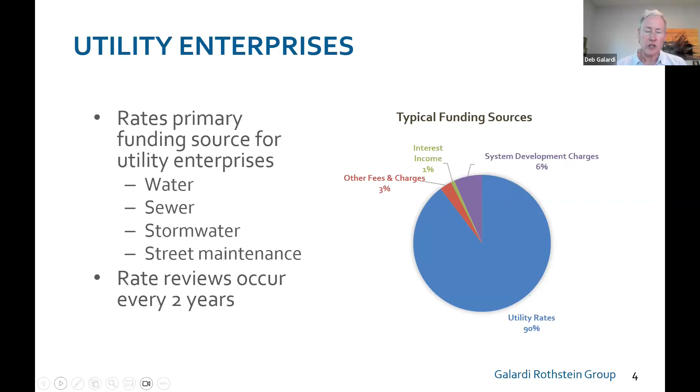So these systems we review. I say we because I worked with the city on the last couple of rate reviews. Every 2 years, the financial plans are updated and rates are adjusted accordingly. Next slide, please.

So just to point out that on your municipal service statement, there are a couple other fees that you receive that are outside of the rate review process. That's the public safety fee and the communication officer fee. Those are established by a separate ordinance, and council makes the decisions in terms of those rate adjustments. But the water, sewer, stormwater, and transportation utility fee, you can see on this example bill, just to orient you as to which systems we're talking about. Next slide.

So the rate review process includes 3 main components. The first is to identify the financial needs of the systems. So this includes the capital improvements. Those are the improvements to the physical infrastructure of the system. There's debt service, which is paying back borrowing associated with previous improvements for the systems, or in some cases, as in the case of the water treatment plant, most likely will be future debt service.

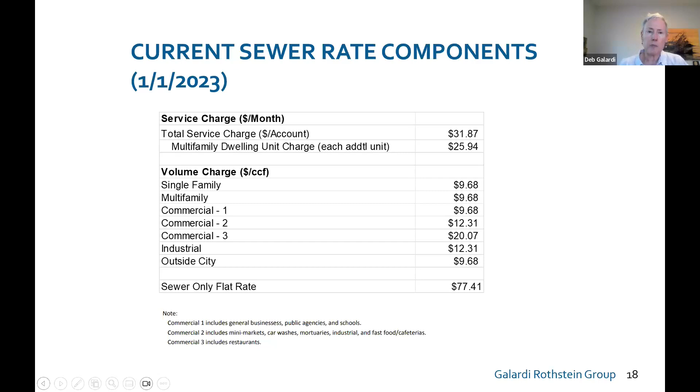So if I'm in an apartment and I'm using 4 units, I'm going to pay less than somebody in a single family home that's using 8 units. But the price per unit is the same because the wastewater concentration is generally the same. Okay, got it. Thank you. Yep.

Transportation utility fees are scaled based on the trips generated per 1,000 square feet based on national data that relates to the different types of land uses. So industrial and warehouse have a lot of area, but fewer employees and things to generate the trips. So they pay a smaller fee per unit. Office also has quite a lot of square footage perhaps, but not as many employees.

And then the rate goes up per 1,000 square feet when you get to more intense trip generating uses like retail, supermarkets, fast food kinds of things, which generate lots of trips. So this is the standard rate structure that's used in the state. There's at least 24 other cities and more that are in process of developing these fees for the reasons that Lance articulated.

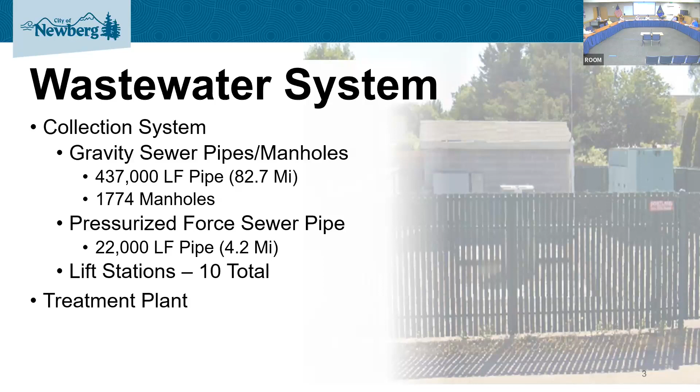So that is in effect extra maintenance and extra expense that the public system is absorbing versus a private individual property owner. Again, the decision was made long ago. Next slide.

The wastewater treatment plant is the really intense capital part of the wastewater system. It's located at the south end of town, close to the Willamette River, right off of Wynooski, I believe is the right street. Built in 1987, it uses a very traditional treatment system and has a capacity of about 4 million gallons a day. In the summer, that runs at about 2 million gallons a day. In the winter, we usually are around 3.5 million.

And you can see part of the issue with gravity pipes and lines and anything in the ground is that in the winter in Oregon, it rains. And so you get a lot of groundwater inflow into the system for a variety of reasons. So that's why you see that flow rate go up in the winter. And it's a little bit of a diluted flow, where you get more of a stronger, I would say, flow where you have less rainwater entering the system in the summertime.

So part of the wastewater treatment plant also includes a very unique solids handling component. The city did get a grant, I think several years ago, to do a solids composting program. So you can actually buy Class A compost, basically almost like topsoil, from the wastewater treatment plant. And that's solids that is processed off the treatment plant and treated to be acceptable for any use, and that includes in your household garden. Total volume there is typically around 2,700 cubic yards of composted solids. It also processes sawdust from local mills to get to that.

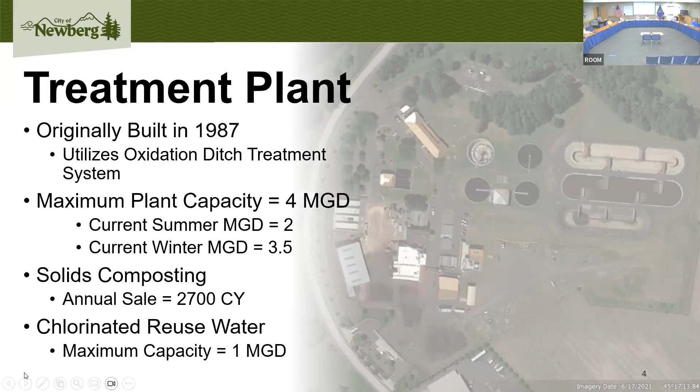So in the sanitary sewer system, the big ones are base system operation and maintenance. The plant processing uses a lot of material, chemicals, electricity, and anything that's moving, pump, motor, eventually it breaks, has to be replaced, has to be fixed, has to be maintained, has to be serviced. All of those things are part of the plant process.

Lift stations are very much the same way. These are pumps, these are electric-based systems that have moving parts and all need to be maintained. Pipes and pipe maintenance, pipe blockages are another big one. Tree roots love gravity sewer lines. They seek them out quite miraculously and are able to work basically through the cracks and joints.

Pipe joints vary based on what pipe you're using. And so typically older pipes are more prone to what we call infrastructure aging, I&I, inflow and infiltration, where as pipes age, the ground will move a little bit and those pipes will tend to separate or fail or thin or crack. And so there's more maintenance that goes with those.

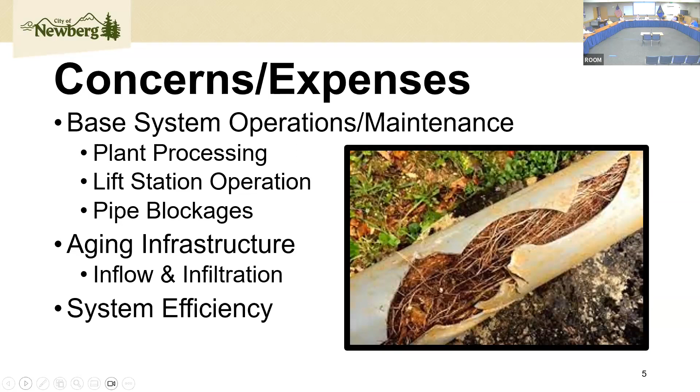The more efficient we can get, if we can do a system improvement where we can do a gravity pipe to replace a pump station or lift station, then that's a good thing, because even though we're making that initial capital investment, we're also reducing our ongoing O&M costs. So sometimes some of those big capital expenses can help offset and reduce ongoing operation and maintenance costs.

Next slide. Here's another example of pipes and pipe systems in the gravity sewer system. An example of I&I where pipe joints have slowly separated over time with ground movement. And then you can see in this picture an example of a video that was taken of a line that separated, and this is actually just groundwater seeping into the pipe through the joints. No root problems here yet, but certainly a problem with groundwater infiltration.

That infiltrated water makes its way to the wastewater treatment plant, also has to be treated just like any other water that enters the sanitary sewer system, and is an additional expense. So one of the things that we also do typically in our capital improvement program for wastewater is pipe repair, pipe maintenance. Pipe lining is a very effective, cost-effective way of dealing with this kind of concern, where we can slip a liner into this pipe, seal it up, and mitigate a lot of that I&I.

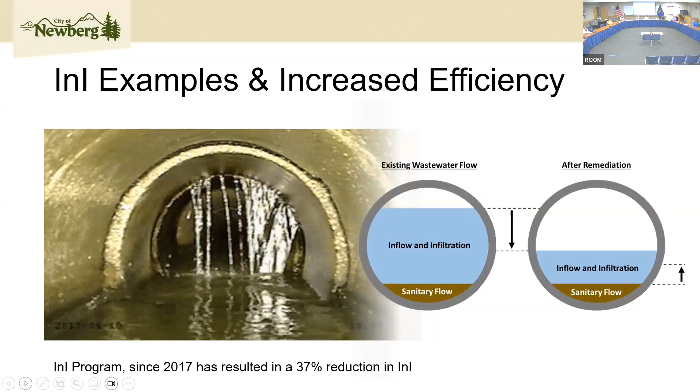Manholes are another source of infiltration where water flows in through joints, cracks, pick holes, you name it, on manholes, particularly in the wintertime. Next slide.

Drinking water system is our other big utility. We'll have additional time to talk about it, but it's really broken down. The way I look at it is source water. Where are we getting our drinking water from? Water treatment, how are we processing that source water so that it's good for us to consume? And storage. How do we store water, particularly as it relates to maintaining reliable flow and supply, particularly for firefighting needs or for peak use.

Storage helps basically moderate how we produce and use water, because typically people will use water at certain key points of the day, when they get up, when they come home, when they go to bed. And then of course industry is using their different times and peaks as well. And so storage helps us moderate those different highs and lows, as well as provide for fire flow where we may need a whole bunch of water in a very short period of time.

And then our water distribution system takes it from where the treatment plant is and from the storage facilities to everybody's individual home and or business.

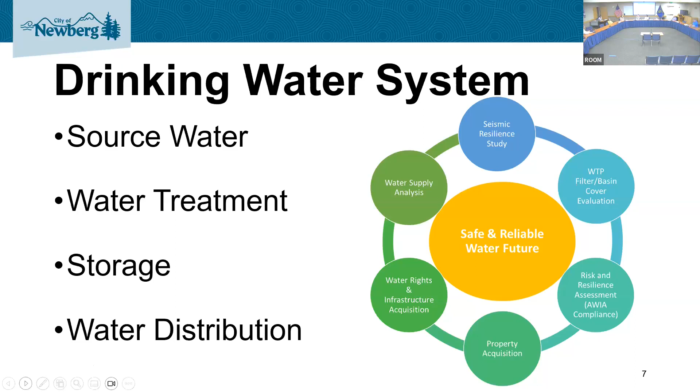Our groundwater system wells are close to the Willamette River, but they are isolated from the Willamette River based on the geological structure of the soil in that area. So we're not actually really taking Willamette River water. We're taking groundwater that's located in a separate layer of rock and soil that's separated from the Willamette River.

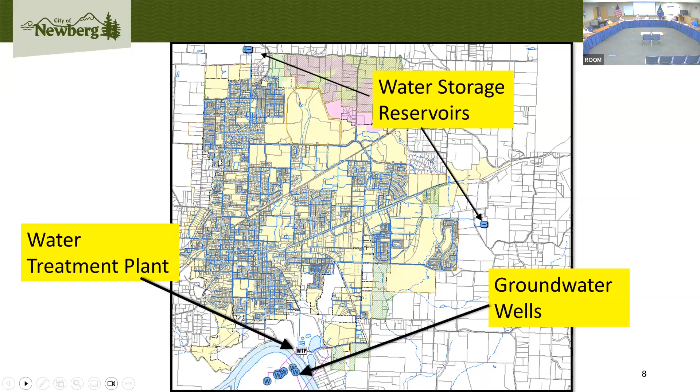Has the water in Newberg always been chlorinated? Yes, and well, let me check that. In the modern era, the water is always chlorinated. My guess is, and I don't know the history of Newberg, but most places when they first started pulling drinking water, they didn't chlorinate. This led to waterborne illness and disease, cholera, those kinds of issues, very common in the 1920s and 30s.

Then we discovered how the world works and that there are microorganisms and all of that. And we now use chlorine. I'm guessing those regulations went into effect in the 50s and 60s, so somewhere in that time frame, you started using chlorination on all your drinking water. And of course, we refine and improve that process over time to have the correct amount of chlorination to have safe drinking water, but not to over chlorinate the water so you don't have other problems as well. So it's a complex system that requires a lot of mechanical and physical process as well as personnel. And so those are driving the cost of the basic rates.

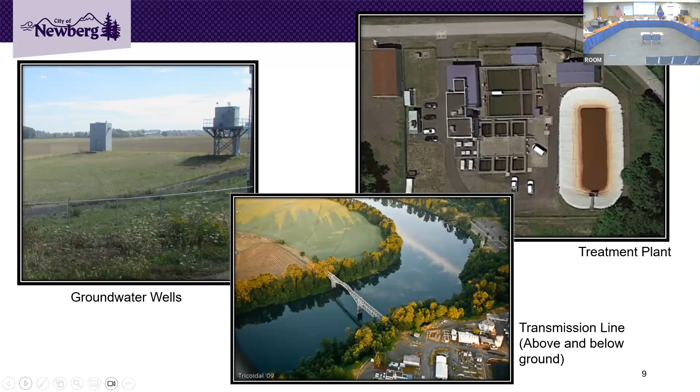And then all of that comes to the treatment plant, which is up in the upper right. You can't exactly perfectly see it, but you can sort of see the red in that big white tank area. It's really an open system, but you can see the iron that's pulled out through the sand filtration process and stored in that tank, where it then gets transported and pumped over to the wastewater treatment plant to treat and dispose of the solid iron along with the other solids at the plant. So that's our water system.

Modern pipe, ductile iron and plastics, pretty resilient. The older pipes of yesterday, like cast iron, tend to break with ground movement. They're not really designed for a lot of that. I think Newberg has some galvanized lines, also not designed to last forever. For scale, I would say modern ductile iron pipe installed correctly could last anywhere from 100 to 200 years. A cast iron line really is not designed to last more than 50 to 75 years. Realistically, design life on that's closer to 40.

Most cast iron lines were built in 1970 or earlier. So anything 1970 and earlier is basically ready for replacement right now because it's over 50 years old and starting to fail. So a lot of investment there for the older parts of town. Part of that too shows up in House Bill 2001, which allows higher density uses in single family residential zones.

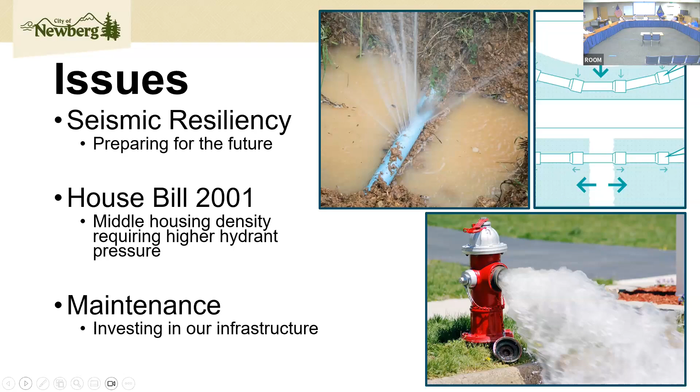Stormwater system, relatively newer utility function. Back in the days, 50s, 60s, 70s, I would say even in the 80s, you just sort of drained to the river or the creek and out it went and nobody cared. And then people started wanting to be able to swim and use the Willamette River and other creeks and rivers, because not necessarily the best stuff was coming down those systems. And so the Clean Water Act came into existence in the 70s. That was then strengthened in the 80s and 90s.

It really became a full-fledged effort in the mid-90s to really control stormwater discharge, make sure that rainwater and groundwater is flowing to the collection stormwater system, and that we started actively working on not just building pipes and inlets and getting water to flow where we wanted it to flow, but also treating that and making sure that the discharge was appropriate to wherever it's draining to. So new systems are now in place. You see those with every new subdivision that gets built.

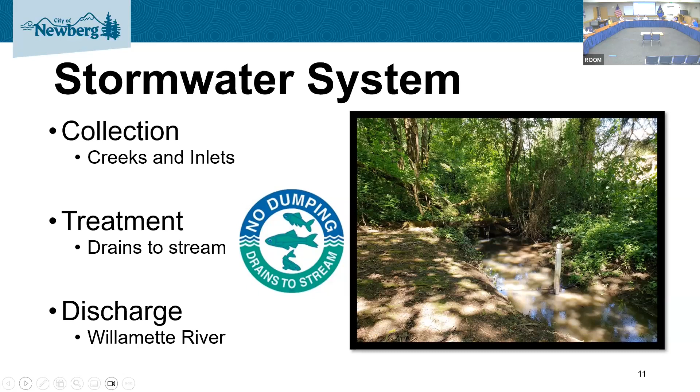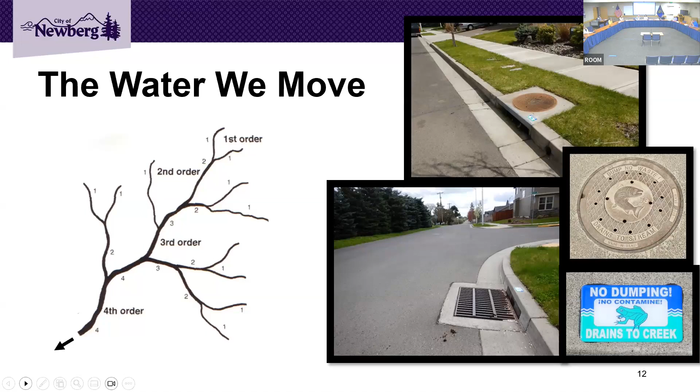This is really designed to just capture rainwater and rain flow that occurs naturally and drains through our system to those natural creek and river watershed areas. Next slide. Out of curiosity, are there any restrictions on rain barrels in Newberg? I don't think there's any restrictions that I'm aware of for rain barrels. We talked about this. For the system to work, you had to have so much flow to get into the system to use it. I thought there was somewhere. Are you talking like individual rain barrels on your house? Individual, yes. Yeah, so those are great. I mean, there's no restriction on that.

But if you think about rain in Oregon, the problem with reuse of rainwater in Oregon is we don't have any rain all summer, and then we have constant rain all winter. And so if you're using a rain barrel for irrigation or something, when you need that water, it's really not going to be there because it's not going to rain for several months, like June, July, August, right? And then it'll be overflowing full December, January, February. So those are great thoughts. Cisterns are always great thoughts. Cost effectively, for Oregon, it's not necessarily a perfect system, particularly where we live.

Yeah, I was just curious, 'cause I think I've read other places do restrict those. I know I have one that was in the house when I bought it, and you're right, it overflows in the winter. But at some point you get to use at least what's in there. Yeah. And at least it doesn't have all the chlorination that the regular water does. Yeah, and of course you can dechlorinate regular water, but that's an extra step that most people don't take. Right.

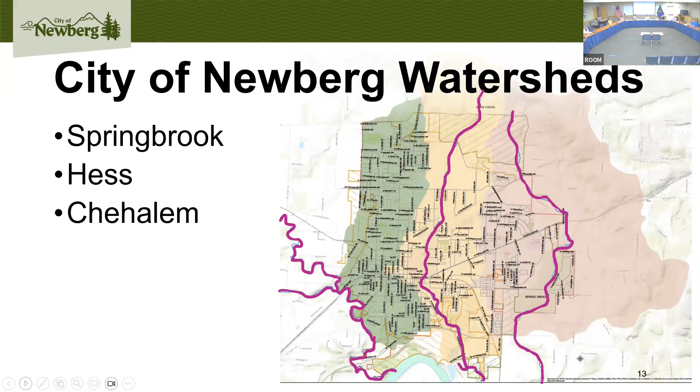Next slide. Hess is the main one that runs right through the middle of town. Issues, again, always the issue with every utility is maintenance, basic operations. In stormwater, it's cleaning all those catch basins, maintaining all that pipe. We have a number of catch basins that have to be sucked out and removed. That's the mechanical part of the treatment, really, is whatever's captured in catch basins or our water quality manholes gets sucked out and cleaned on a regular basis.

Another part, like we mentioned, is regulatory. Department of Environmental Quality requires the city of Newberg to do a TMDL, or total maximum daily load program, monitoring and reporting system. So we're constantly monitoring for temperature in streams. We're monitoring for other factors in the streams. All that gets reported back to the state DEQ to make sure that the discharge that's being released from the city of Newberg meets their basic requirements for discharge to those creeks and ultimately to the river.

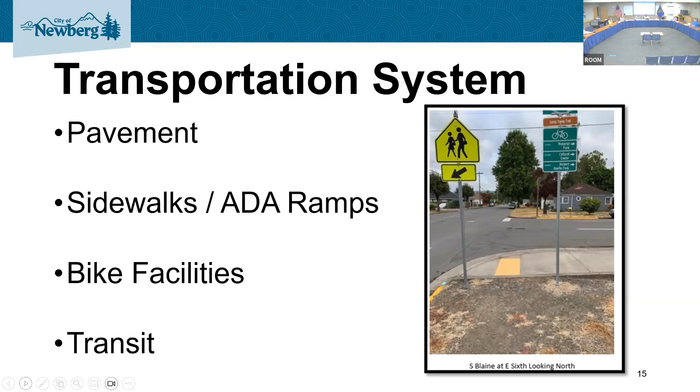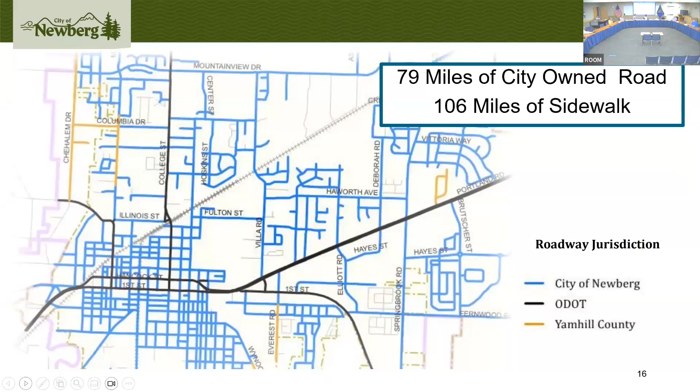Issues with our local pavement are really just basic pavement maintenance, right? So it's potholes, pavement wears out over time, asphalt doesn't last forever. Water and the Oregon environment really chew away at basic asphalt, separate asphalt from the aggregate and cause delamination, potholing, pavement failure, rutting. I always fear winter freeze-thaw cycles because they will ruin streets, and it's gotten noticeably worse, I believe, in my 25-year career, with more extreme weather events that contribute to that kind of issue.

Other items, like I said, sidewalk gaps, ADA facilities is a big one. Creating handicap accessible facilities that meet modern ADA design requirements and any bike facility gaps. Again, for the utility portion of our infrastructure, it's really about maintaining the existing pavement. And we have pavement condition indexing. We rank and rate all of the streets in town so we can then prioritize where to best utilize those transportation utility fee funds to do basic pavement maintenance.

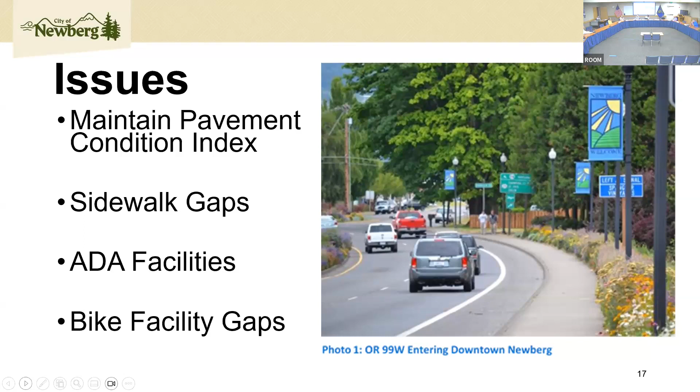Yeah, and the other thing to remember with gravel streets is they're somewhat pervious, so water can infiltrate. When you're converting from gravel to paved, you're adding not just the solid surface, but also some component of stormwater runoff that has to be addressed under the modern systems. So typically when you're talking capital improvements in streets, you're simultaneously talking improvements in stormwater. Yeah. Next slide.

For pavement condition indexing, we have a system based on a scale of 0 to 100. 100 is perfect, brand new. 0 is gravel or dirt and terrible, and then everything in between. Typically a good street would be a PCI of 70 or better. Fair is starting to show signs of wear, some cracking, maybe some alligatoring, some delaminating or raveling. And poor is really your pothole-laden street; pretty much anything 45 and under isn't good. When you get really low into the 10s and 20s, that's when it's pretty rough. Next slide.

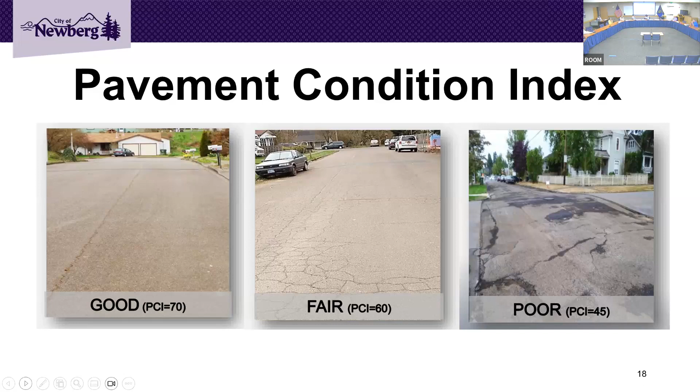And of course, each different PCI rating could trigger a different type of treatment. So one of the things that we're typically doing with pavement maintenance is we're trying to keep that pavement rating up, because it's incrementally more expensive to do those bigger fixes on a much worse condition road. So if I can just do a simple sort of slurry seal and extend that pavement life, that's a much lower cost per square yard than complete reconstruction of a road that's failed.

And we are doing a lot more creative things nowadays than we used to. Things like cement treated base, which was successfully applied this year on a couple of roads, helps minimize inconvenience as well as cost, particularly cost, while bringing up that street to an acceptable condition over a very long period of time.

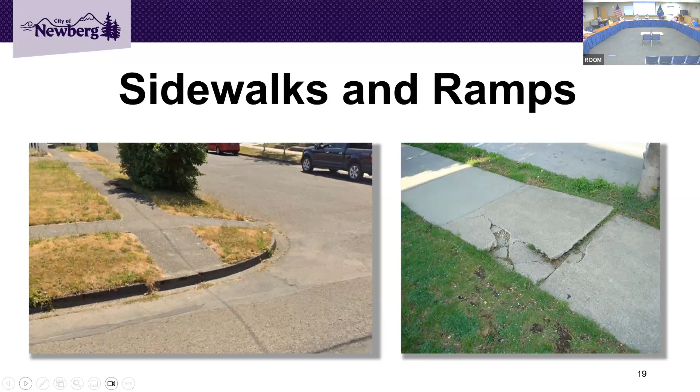And I think that's the end. So any questions on the general overview of capital? Again, we'll be getting into more details when we get into each individual section.

All right, if that concludes all the presentations. Yes, excellent. The next topic is public comment. I will now open the floor to public comment. Jen, do we have any public comments? Oh, Jen, sorry. My eyes are going blurry. No, we do not. Thank you. If there are none, I will close the public comment session. Katie, can you please take us through the next agenda before we adjourn?